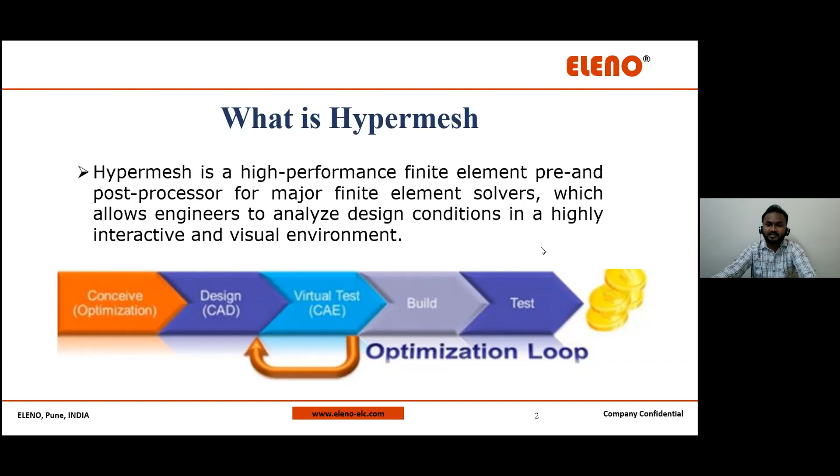Any engineering problem can be solved using three methods only: analytical method, numerical method, and experimental method. Do you know all these methods? Say yes in chat box if you know them. I think whoever has joined must know these things.

What is the analytical method? There are some formulas, and this is a 100% accurate method. If you are calculating stress for a cantilever beam, there is a formula, you directly put in the formula and get the answer. So the result is 100% accurate, and it's a closed form solution because we get the perfect solution.

But it's a classical method. So whatever basic applications or basic calculations are there, we can go with the analytical method, right?

Understood everybody? So next is the numerical method. What is numerical method? You learn this in 12th and first, second year of engineering - Runge-Kutta method, Taylor series, bisection method. These are all numerical methods. Integration by parts, matrix solving, these things are done by the software.

Which software? These softwares are the solvers, right? These are all called solvers. So what does a solver do? Solution of matrices is done by the solvers.

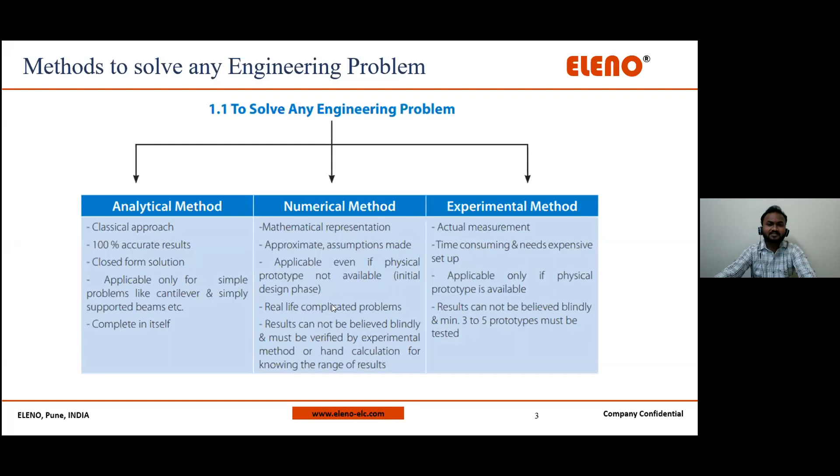Any engineering problem we are solving by using software goes through three processes. First is pre-processor, second is processor, meaning processing or solution, that is solver, and third is post-processing. Understood everybody? Preprocessor, processor, and post-processor. These are the 3 points we have to understand here.

So what pre-processing does, it consumes the most time out of the three. For meshing of plastic parts, 3D meshing, hexa meshing, most of the time-consuming part is the preprocessor. Agree with me? If you are using Hypermesh or any software like ANSA, preprocessor consumes a lot of time among the three.

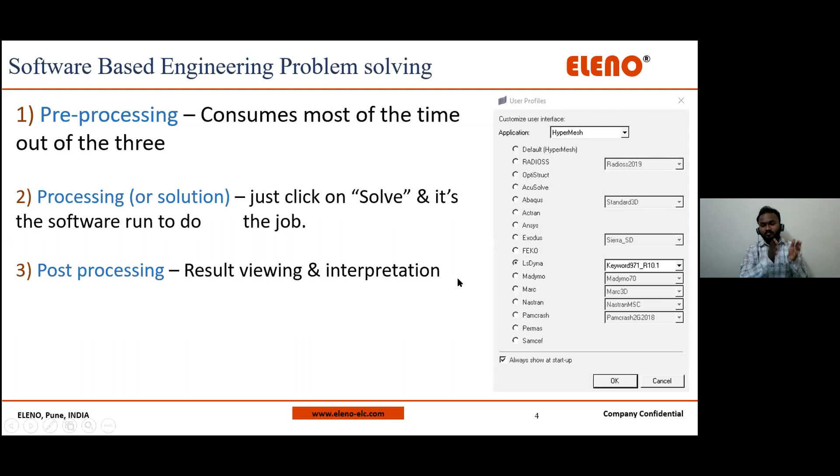See here, this is the user profile, okay. Whenever you open the hypermesh software, this user profile pops up. What is it for? So for which solver are we going to use hypermesh? Hypermesh gives support to Radioss, OptiStruct, Acusolve, Abaqus, ANSYS, LS-Dyna, Nastran, PamCrash, and likewise. So this is the most important thing, that the preprocessor supports these solvers, okay.

Got it? Yes, got it? Then please say yes. Understood? You can say yes.

Yes, Rajesh. Yes, thank you. Thanks for replying. Yes, Jishan.

So the next benefit is cost effectiveness. If you go for the pricing, hypermesh cost is much cheaper than others also. So pricing matters over here, because when we go to the customer, at the customer end we have to do quality work at minimum price. So cost effectiveness is the most important thing over here, right?

And solver specific user preferences. If I'm going for changing any solver interface, if I'm selecting, I will revise it once again in the next slide, okay. What is the solver specific user interface?

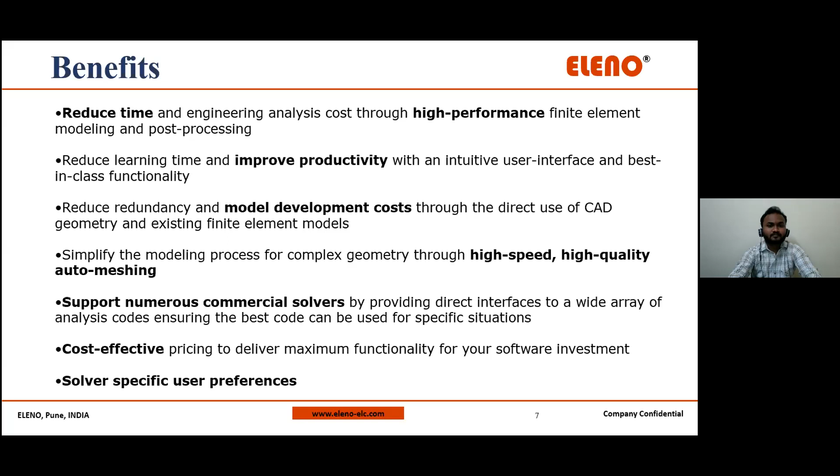Understood, right? So next, what is hypermesh and what we have to learn in hypermesh, okay. So what is hypermesh? It's a software we use for preprocessing, likewise. So what we are going to learn in this total session is introduction to hypermesh first, so we learn about that. Then creating geometric model, okay.

So hypermesh gives us a few geometric commands, right, so that we can create a simple model for any kind of analysis, right? So geometric cleanup processes we have to do, third step. Then next thing, 1D meshing, 2D meshing, 3D meshing, right?

So one dimensional meshing, then two dimensional meshing, three dimensional meshing. If there are certain parts, then we have to go for meshing according to the parts, right? So we will learn these things also.

Next to that, we will learn about maintaining quality criteria at each time of meshing, right? Quality criteria is the most important thing, because when we buy any product we check the quality. Likewise in CAE also there is mesh quality, right? So mesh quality, how to maintain it, how to clear all elements to okay quality, we will check in this panel, right? So creating FEA model.

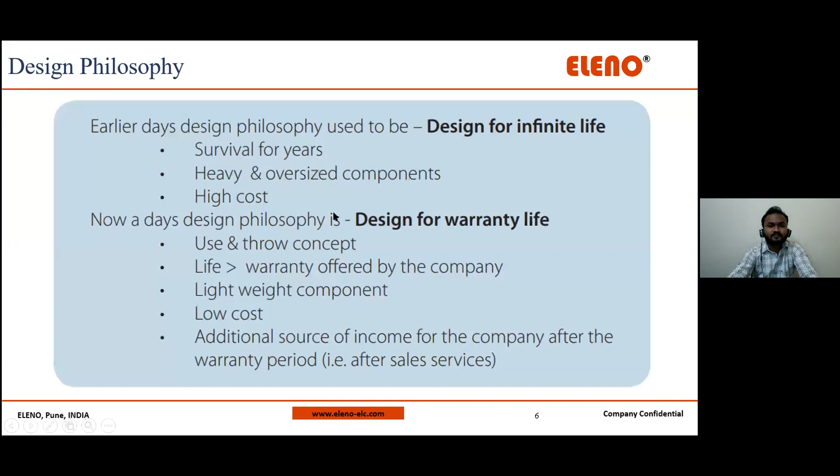So whatever model I have shown over here, see, likewise, okay. So likewise model for meshing we can do in this thickness assignment. There is a most important task: thickness assignment. There is variable thickness in plastics also, okay. So we have to go with thickness assignment according to the variable thickness, right?

So we learn plastic meshing, because plastic parts have some different kind of features, ribs over there for strengthening the parts. So we learn plastic meshing over here. Then fast meshing techniques, because fast meshing technique is much more important for interview purposes. If you are going to crack the interview, you have to focus on the part within 1 hour. Within 1 hour you have to finish maximum amount of part with quality, right? And feature capturing also.

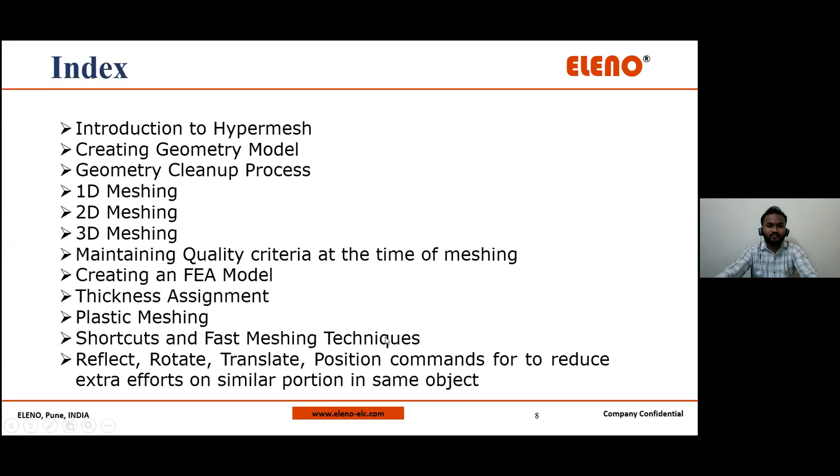Then some reflect, rotate commands also there, right? So see, now today we will learn about the hypermesh window, okay. So how does the hypermesh window look like? Okay, yes please, is it visible to all of you? And whatever we learn, is it understandable? Okay, yes please answer from your side, use the chat box.

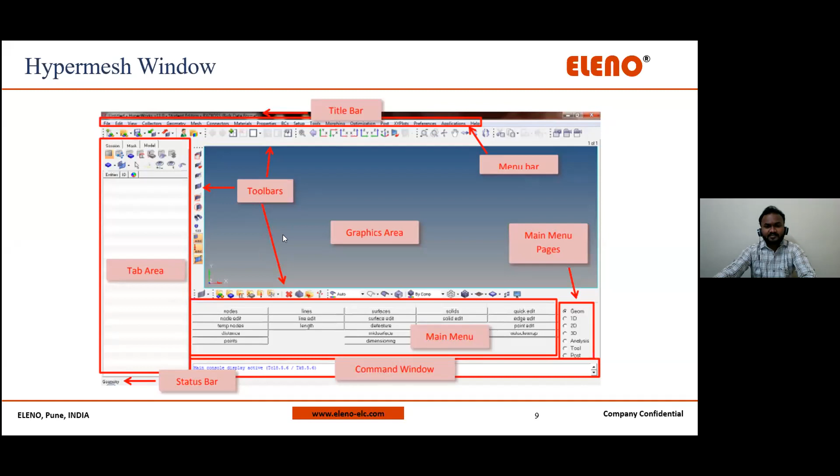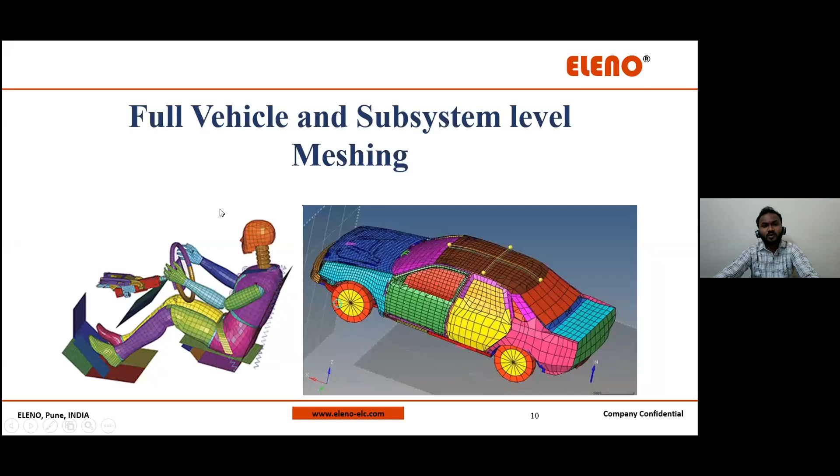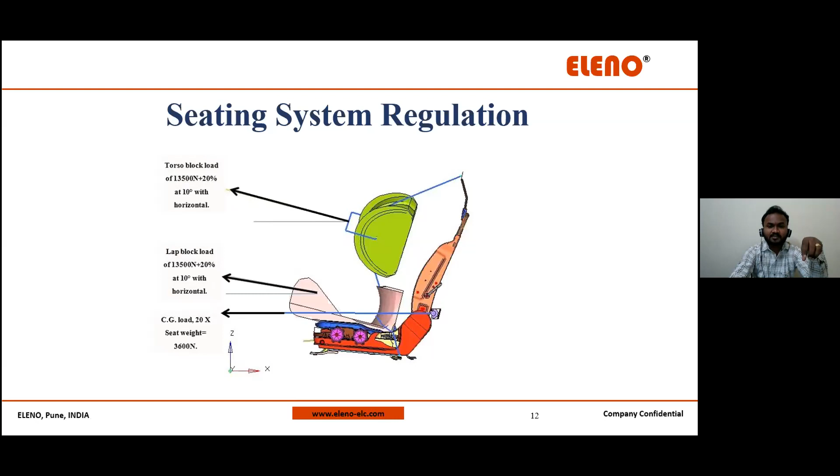We can model subsystem level up to the full vehicle level. In hypermesh modeling, in a basic way, we can go from subsystem level to full vehicle level meshing and modeling. Then next, simple analysis from ball impact up to seating system or subsystem level regulations, to the full vehicle frontal crash, or full vehicle analysis. So all these models we can prepare inside hypermesh.

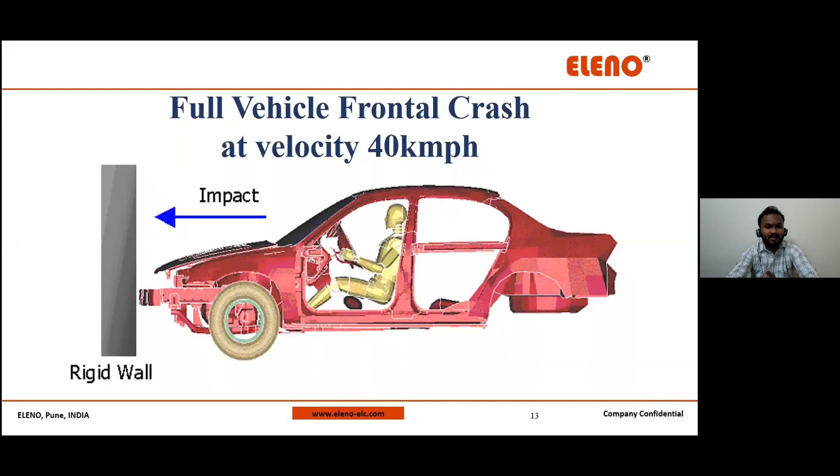Understood? So, ball impact on a 2 mm thick plate, up to the full vehicle crash - up to full vehicle crash we can prepare the model and meshing in hypermesh itself. So this is the basic preparation for a CAE interview.

Why do we go for this meshing and all these tasks? So, any interview questions regarding CAE, do you know? Every time meshing comes up as one question, right? Yes, anybody?

So what is the CAE interview technique? Is it right or wrong - short written test, meshing or analysis test, and then interview. Is it okay? Say okay. Is it okay to all of you? Yes, Reddy says okay, Rajesh okay.

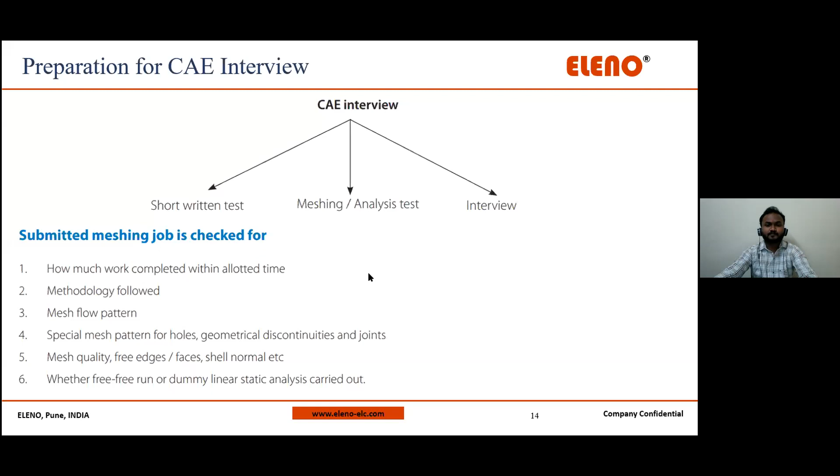Yeah, okay next. Now today we will learn a few things in HyperMesh. We'll start the first class of HyperMesh, because by now we've taken a lot of time over what HyperMesh is, how to use it in industry, and where we can go for job interviews and all these things, right? So now we will prepare such models, geometrical models, right? Understood up to this?

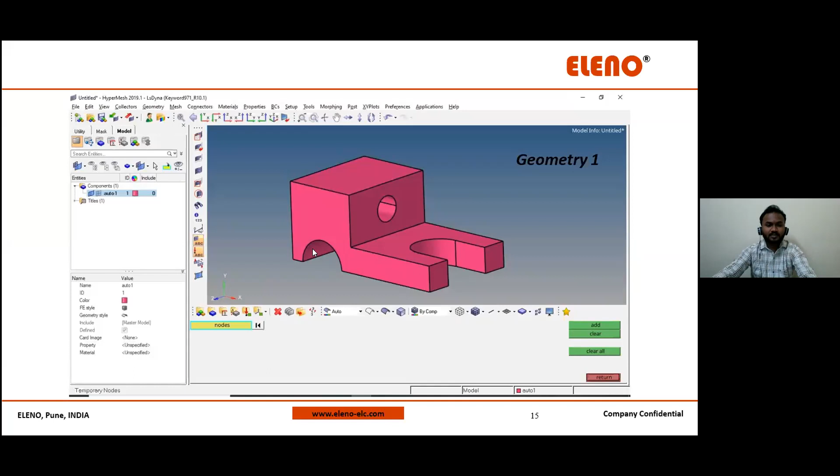See here, this is my HyperMesh window, right? Is it visible to all of you? Yes, okay, thank you. So whatever we learned before, we will learn once again over here, right?

This is the title bar. It says untitled, HyperMesh 2016.1, and we are using LS Dyna as the solver. This is the drop down menu bar. Then next is the toolbar, this is also toolbar, and this is also toolbar. Then graphics area, upper tab area, lower tab area, main menu pages, main menus, right?

So simple flow for HyperMesh. For a newcomer, just keep this in mind: if you are going for any geometric task, if you want to create a surface, a solid, or a line, it's a geometrical part, so go to geometry. That's it.

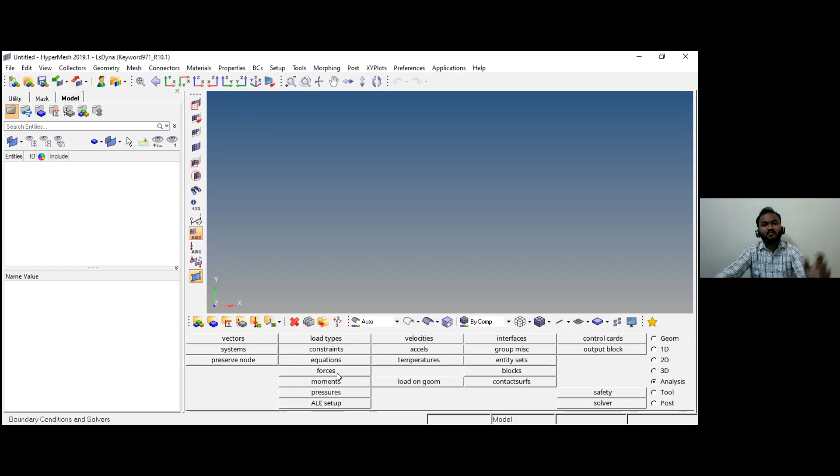If you are going for 1D meshing, go for 1D. For 2D meshing, sheet metal meshing, go for 2D. If you are going for volumetric parts, go for 3D meshing. Then analysis: if you are going for any type of load application, constraint, force, or moment application, then go for the analysis. Understood, everybody?

Then tools. What is tools? Whatever meshing we have done, if there are similar parts, we use translate, rotate, reflect - these are commands we have to learn under tools. What will it do? It will reduce your effort, minimize your effort on the same part. You can translate, reflect, rotate, project. And post is for post processing.

So today we will learn about the first chapter, which is geometry. Got it? Yes, thank you so much. It means whatever I'm teaching to you is understandable, right?

Let's see the quick commands for geometry. Can you import one geometry to explain? I don't have any IGS file right now on this PC, but I'll show how to import the geometry. Here is the import command, or file import.

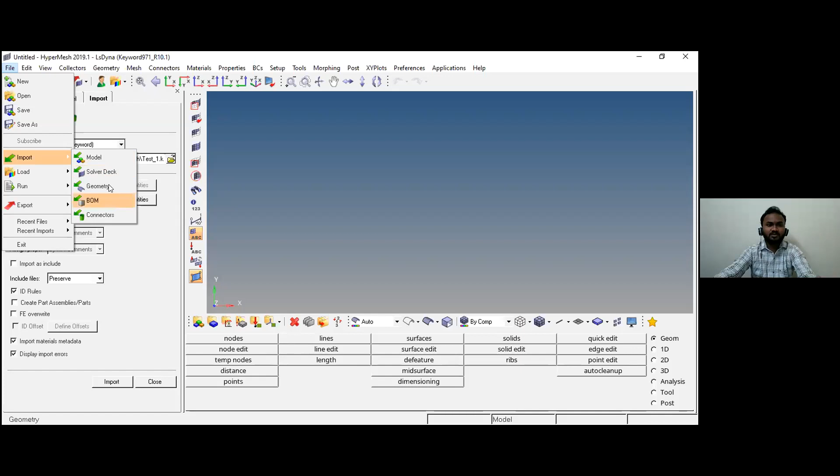If you are going for any geometry import, use this geometry option. If you are going for model import, whatever HM model you have, use import model. If you are going for mesh import only, go for solver deck import. So for geometry import, you can choose the IGS file and open it here. I don't have any CAD file right now, so we'll proceed likewise. Today we will learn how to draw anything, a geometry.

So geometry - how to create a node. From node we will learn up to solid. How to create a node: there are multiple options to create a node over here. By using the coordinate system you can create a node, and if you go on surface, you can also create a node on surface.

On the lines you can create nodes, and if two nodes are there, in between these two nodes we can create multiple nodes. What is a node first of all? If I am going to create by XYZ coordinate system, create, and press F, fit to screen. Otherwise there is another option in toolbar. See here what it is - it's fit model, right?

This is a node. If I'm going to draw a cube over here, what do I have to do? Something 50, create, fit to screen, right? Understood?

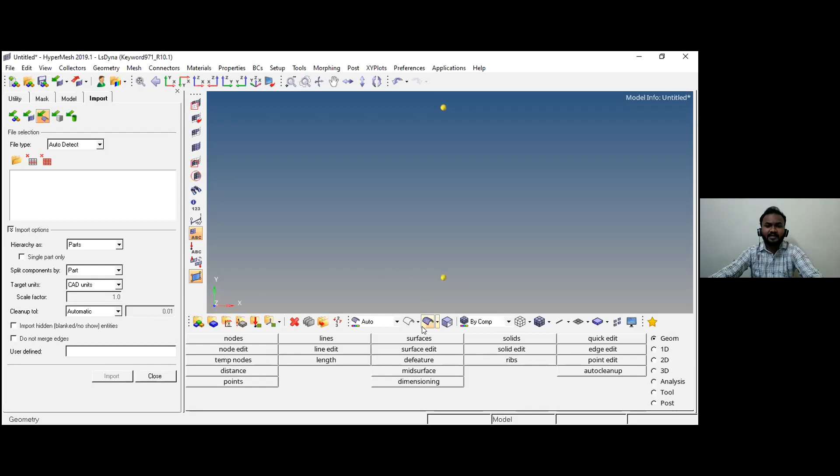Now geometry lines. I am going with the geometry panel. I want to create a geometry of a cube, suppose. So I go to the geometry panel, and I'm going to prepare the first node. From node I'm going to prepare a line. From line I'm going to prepare the surface, and then solid, right? This is the path for creation of any geometry. There are some shortcuts, but this is the classical path.

You can create a cube directly here, but these are the primitive shapes we can create. If you want to go with other shapes, you have to go with nodes, then prepare line, then prepare surface, then go to the solids. Understood, everybody? Yes Rajesh says yes, Jishan yes, Tejas yes.

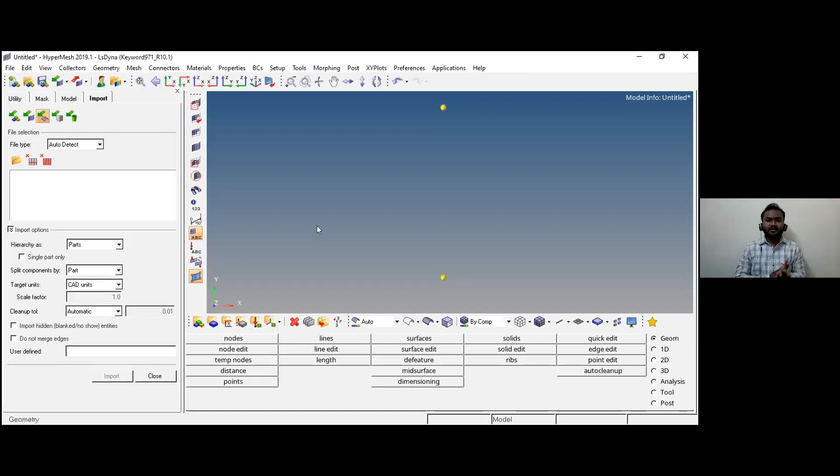So anybody can answer me why we are going for preparing geometry over here? Is it necessary to prepare geometry or learn geometry in HyperMesh? Say yes if necessary, say no if not necessary.

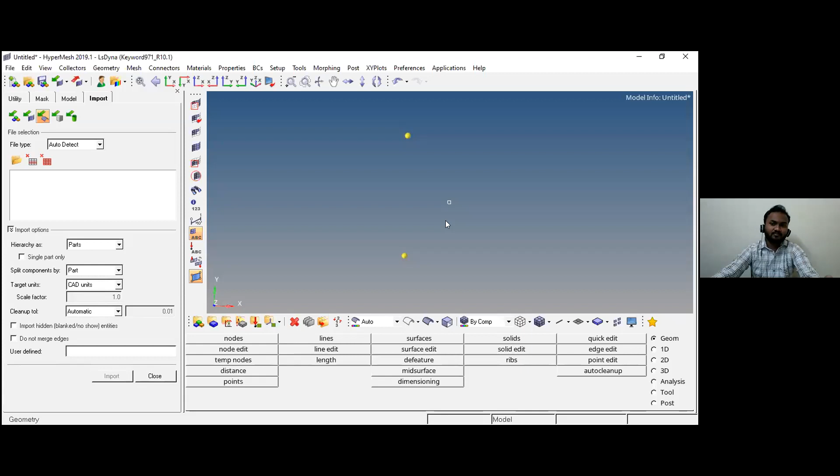Rahul says for simple models. Rajesh says to perform meshing - so for performing meshing, we have to go with the meshing tools. Sachin says necessary. Prashant Jagtap says for simple model design modifications it will be useful. So any design modification, if you want to consider, then you are not going each time to a CAD engineer to do necessary changes. You can go with your HyperMesh geometry section and create or reconstruct the model wherever required. If a CAD model is there, then it's not required - perfect answer. Then, maybe if needed during geometry cleaning. Rahul says yeah, thank you. These all answers are correct.

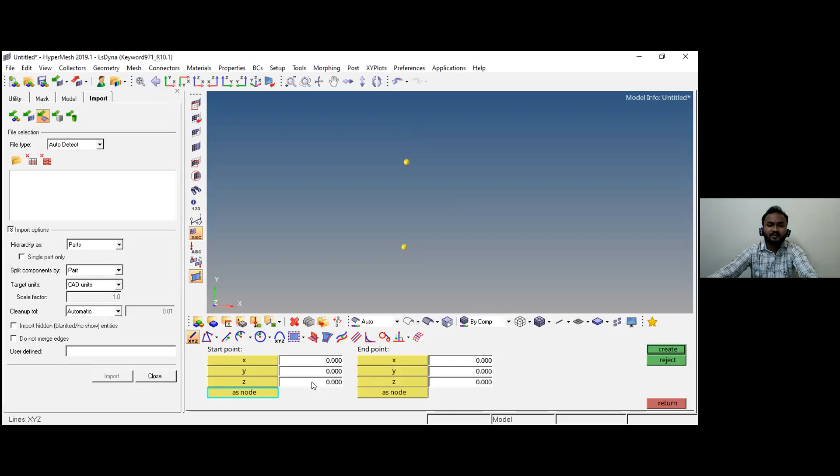So next thing, geometry lines - go with this also. You can select as node this node. Whenever I am selecting this node, see here the coordinate system gets changed as node this node. Got it? So create.

If I'm creating a line over here, what will happen? If I'm going to this model here, component will get created. Got it? Before that, reject - if I'm rejecting the part in upper tab area, nothing will be there. If I'm going to create line, component gets created auto one, right? So what is the purpose of this component? It contains meshing as well as geometry. Line is a geometrical part. Now on the screen, there is no mesh.

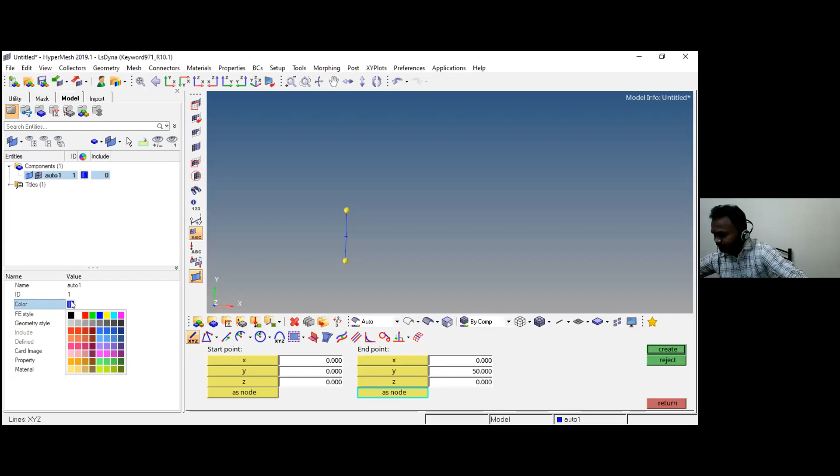Understood, everybody? So next, if I want to change this color because it's not visible to me also... Yeah, so this is a line.

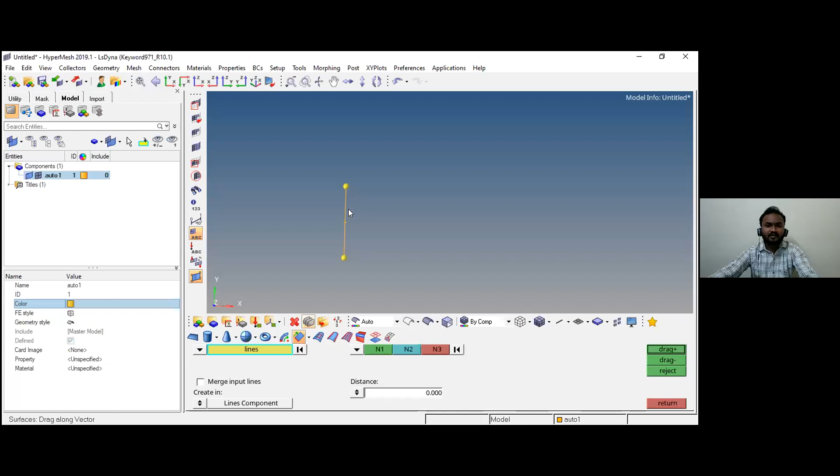So I want to create a cube - then what to do? See here, geometry, I go directly to the surface. There are a few commands over here, I'll go one by one. This is drag along vector. If you are going for any CAD software, there is an extrude command - so likewise here, drag along vector. Click on this line, and in which direction you want to drag - if I want to drag in x-axis direction, this will be your x-axis, and distance 50 mm drag. Got it? Understood? See here, this is a surface.

If I want to create a solid from this surface, I can go to the solid command. There's also an option here - what is it? It's a drag along vector. Same thing here, I'm clicking on this. So select on surface, select on surface.

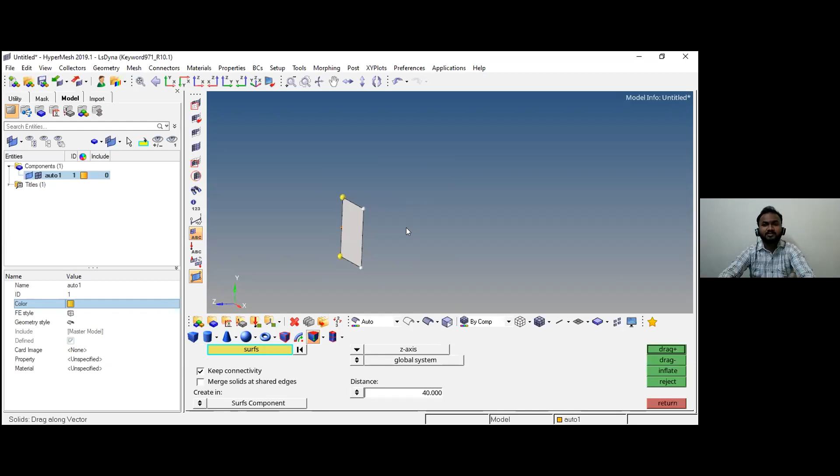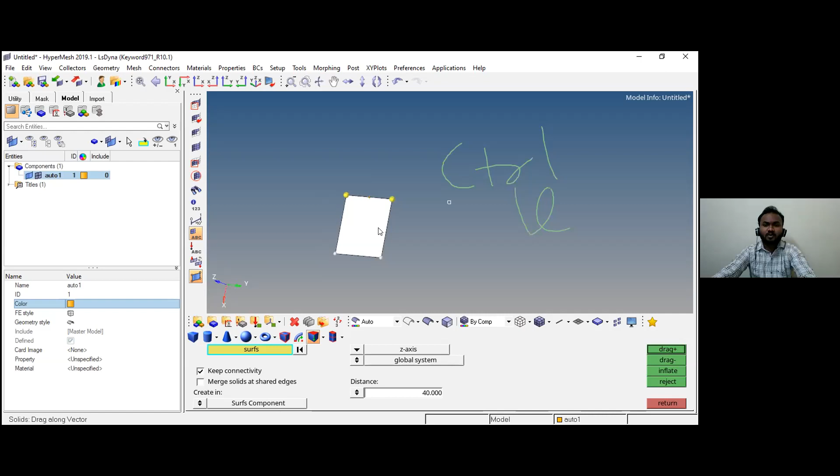Now, for newcomers, one thing I forgot - how I'm using this mouse control. If you are pressing control, then only your mouse will work, otherwise it will not work. If you are pressing control, then left click - control plus left click - it will rotate.

If you are not using that, there is a command here also, see, rotate. You can rotate from here also, but in which direction you are rotating, you have to rotate with the axis only.

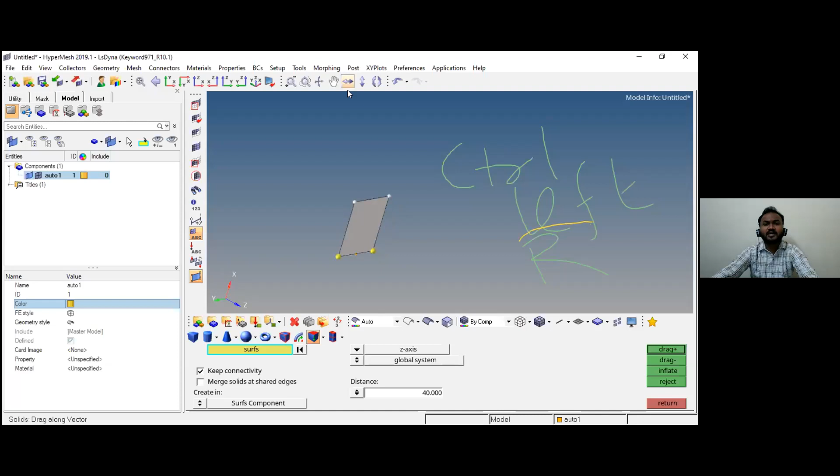Next thing, control right click - it's a pan. Control right click, it's a pan. Control plus scroll, zoom in, zoom out.

What happens if I am rotating such a part and I want to go back to where I started - I forgot where I started, which axis I have used. For that purpose there are axis notifications here: XY axis, XY axis in opposite direction, then XZ axis, XZ axis, YZ axis. I will go with the XY axis - see, okay, so you will get this.

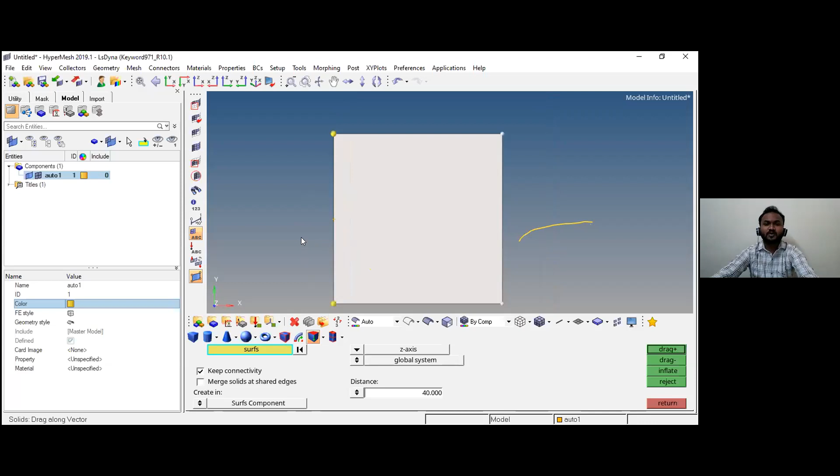Understood, everybody? Say understood in the chat box. Yes please. Have you understood? Yes, thanks, thanks a lot.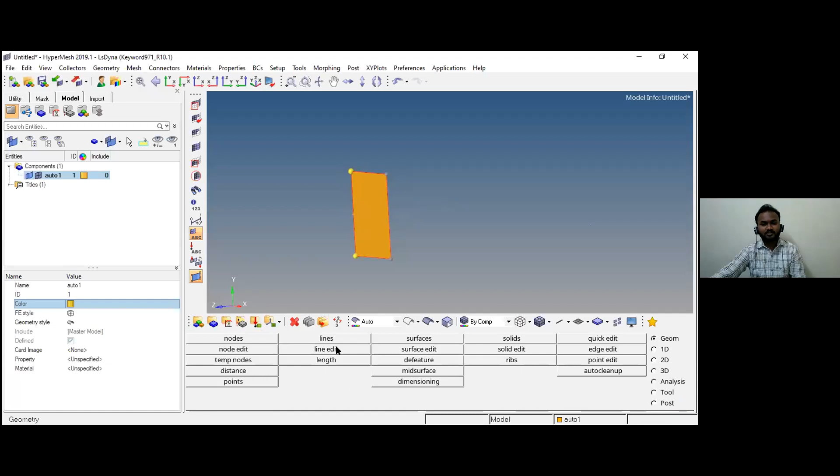So next thing, I want to create a solid - how to create a solid? Same thing - if I am dragging something, it will convert into the further thing. What I'm saying is geometry: if I'm going to drag a node, sorry, line - if I am going to drag a node, from node it will create a line.

If I'm going to drag a surface, see here - if I'm going to drag a line, then it will create the surface. Same thing in solids also - if I'm going to drag along the vector surface, it will create a solid.

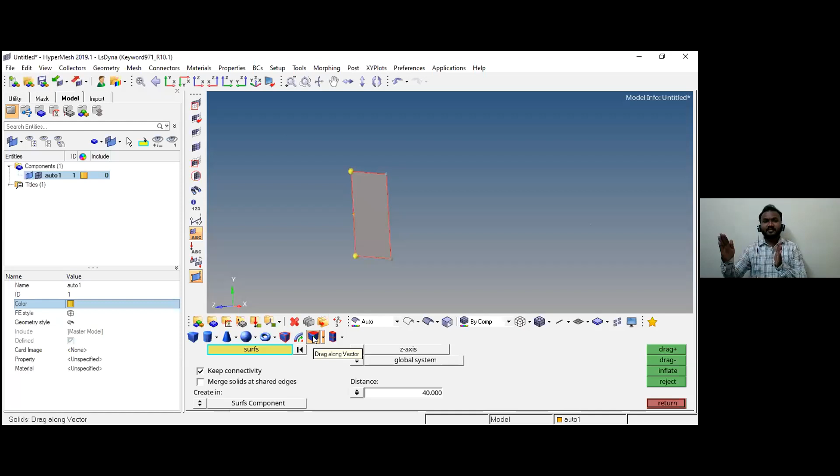So click over here, solids, right? In which direction? You have to select the direction perpendicular to this plane. Why? Because if you want to create a solid, then you have to select this Z direction. See, this is the axis notification: X, Y, Z. So Z direction in positive or negative direction, whatever it may be - I'm creating this here, 60 mm. Okay, this is a global axis.

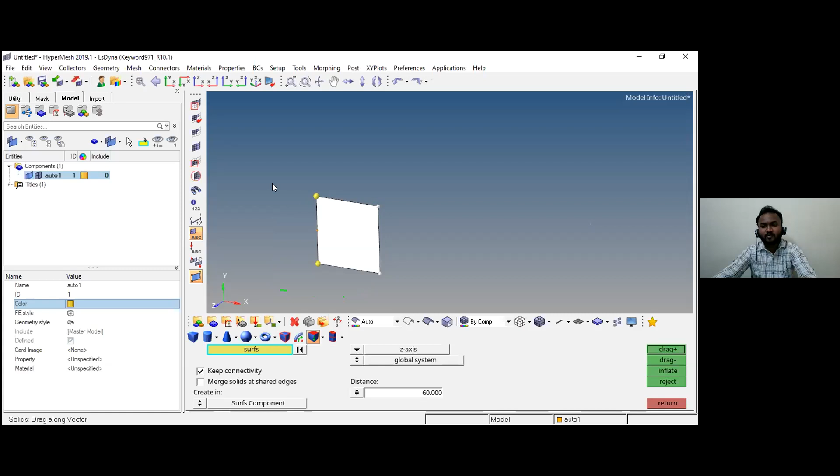See here, normal to screen you can drag, normal parallel to screen you can drag, right? See what happened - if I'm going for reject and drag minus, it will go in reverse direction. Understood everybody? Yes, please say yes.

Yes. So what happened, each time we have a solid section, right? But if you want to put a hole over there, same thing, geometry nodes. If I want to create a hole over here - Nivas asks, what happens to that surface? So the surface gets converted into the solid, right?

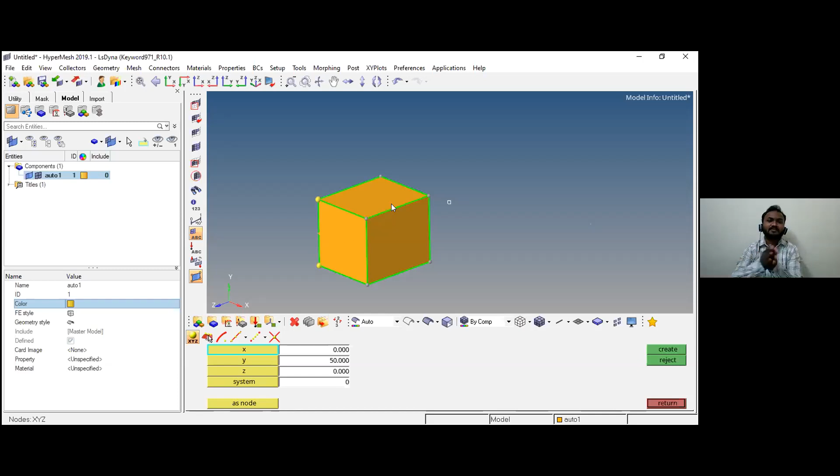Rajesh says, how can we drag in a parallel direction? We cannot drag in parallel direction. If I am dragging this in parallel, what will happen? Is it converted into solid? No. We have to drag perpendicular to this plane, only then will it convert into the solid.

Right? So next, I want to create a hole over here. So here's one option - what is this option? Arc center. Click over here: 1, 2, 3, 4 - if I'm selecting these 4 lines, these are closed lines, and create. What will happen? It creates a node centrally - center node will happen over here. It will create a center node.

The next thing, same algorithm we always use: first we have to create a node, then line, then surface, then solid. Understood? This is the perfect rule for any kind of geometry - line. I want a hole over here, so I am taking this circle with a radius of 5 mm or 10 mm - 10 mm radius is fine.

And create - if I'm saying create, it wants the plane. In this plane I want to create a circle, right? In this, which plane is this? XZ plane, right? So I'm selecting the y-axis here. If I'm clicking on the y-axis, then it will select the XZ plane, right? So create - see here.

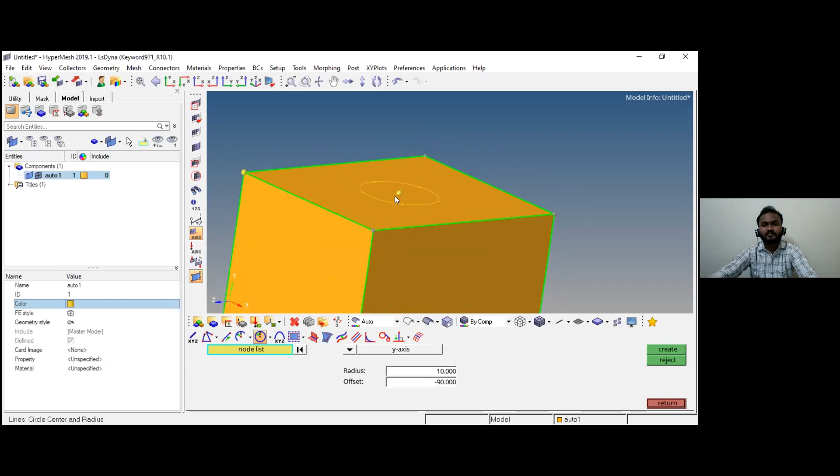Understood, everybody? Now 15 minutes to go. Okay, so see here.

Geometry, surfaces. Now this is the surface, this is a line. I want to convert it into a surface. These are the options. So here's another option - wherever closed lines are there, you can select and convert it into a surface. This option is a filler or spline, right?

Click on this, it wants a line. So I am selecting this line over here. Selected, and create. Got it? Is it understood, everybody? Please say understood in the chat box.

Yeah, now we will repeat the same thing once again. Okay, geometry, solids, surface getting selected.

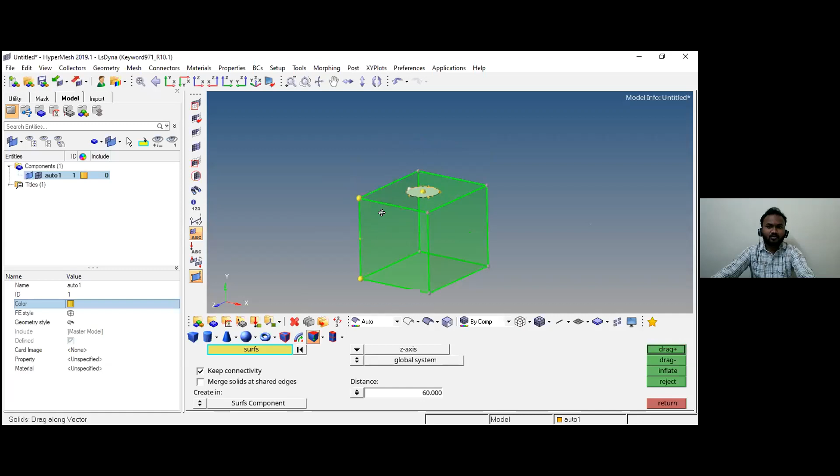I want to drag this in here, in the y-axis. Okay, got it?

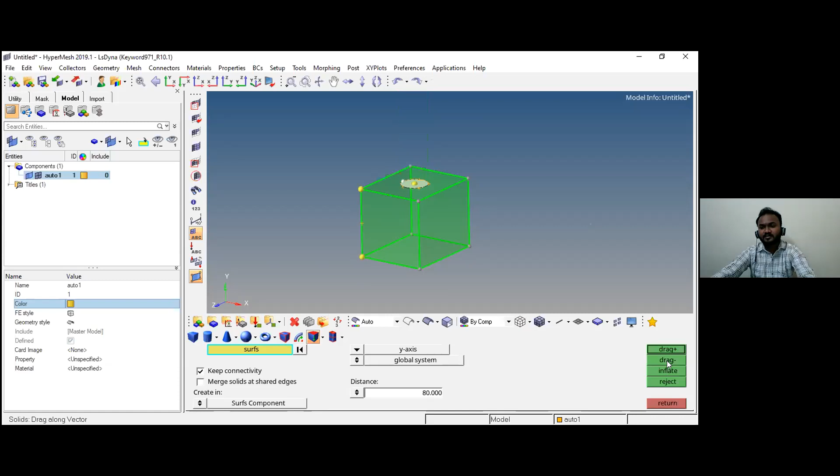Something 80 I'm taking and drag. See, reject, drag. I want to delete this geometry - solid edit, Boolean operation. A, I'm taking this as B, and A minus B - remove B from A, calculate. See, got it?

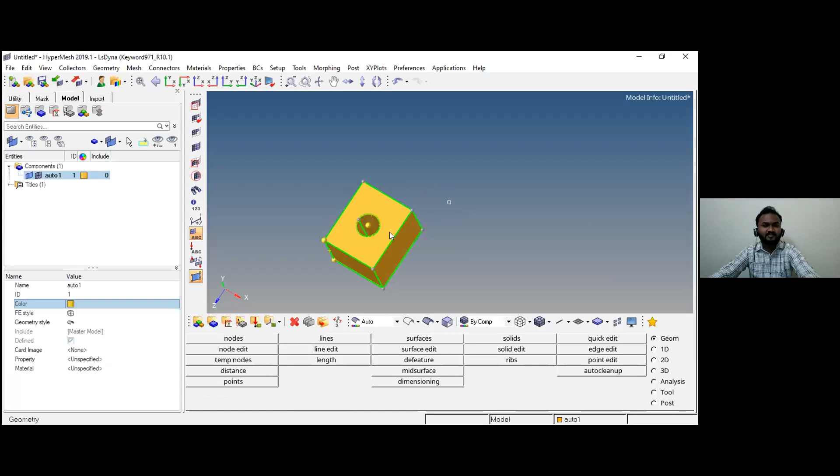Yes, see, yes. So next to that, we have created this solid. So this is how we can go for any kind of meshing also, right?

So for 2D meshing, if you want to go with 2D meshing, you can come up with this manual meshing command and automation command, right? So here we will stop for geometry.

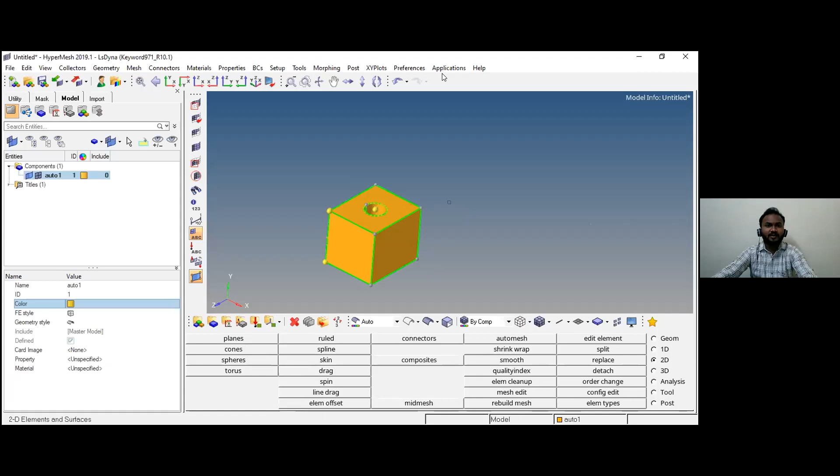Now I will share this PPT over here. So this kind of solids we can generate. See, is it visible? PPT visible to all of you? Yes please. PPT visible? Yes please, okay thank you.

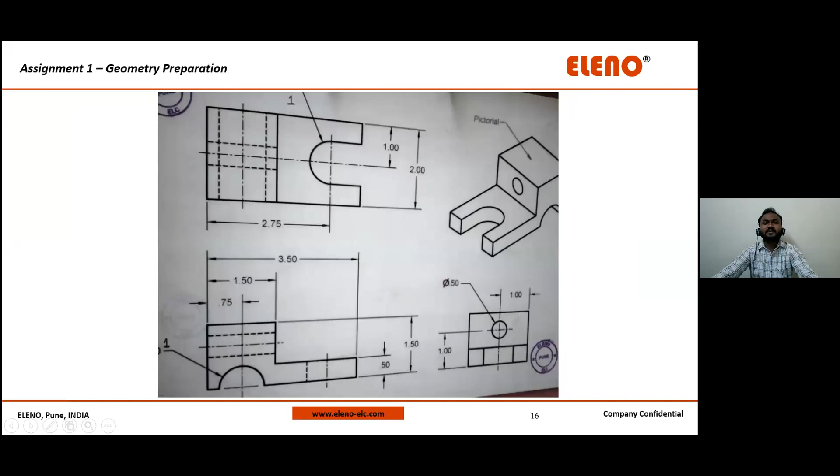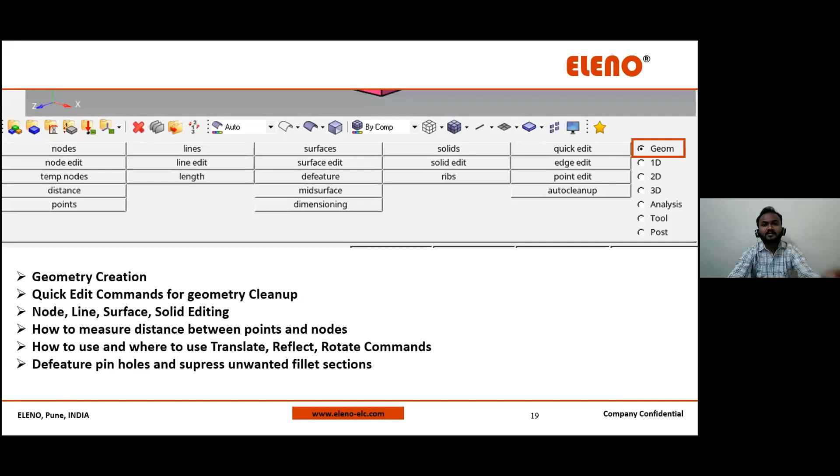So likewise, we can create some geometries. See here, these are the geometries we can create by using Hypermesh. Okay got it? So after that, we can learn in the next session how to set the quality criteria.

Then next, parameter files - how to set it, how to put a washer, what are the fast meshing commands. Then the basics of quality criteria - what is sizes, and we will learn about the definitions. Warpage - what is warpage, what is Jacobian - these are all definitions we have to learn.

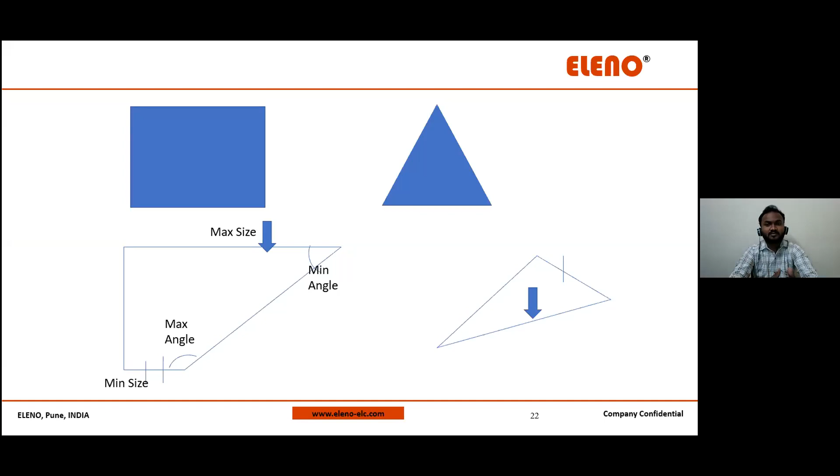Why we are going to mesh on mid-surface - these are all questions frequently asked in interviews, we will learn over here. Then, how not to mesh, how to mesh - these things we are learning in the next session. Okay, so have you understood this session?

Yes, got it? So how many of you here are graduation, post-graduation, and working? Yes, can you please put it in the chat box so I get an idea of the crowd joining.

Yes, Rajesh is joining, thank you. Yeah, working - yes Reddy, yeah working. Thank you, yes working. Yeah MTech working, yes Tejas. Yes Tanmay, thank you. So all are working, and sometimes it takes difficulty. Okay yes Sheikh, yes graduation, Jisan.

So for all of you, there is an opportunity in the CAE field, basically, and we are here.

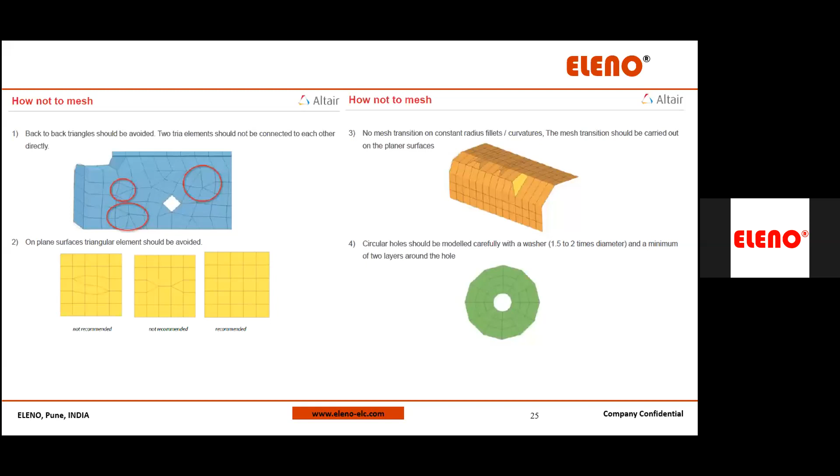Yes, thank you so much. Thank you all of you. You are most welcome. See you, thanks guys. Thanks sir, thanks, yeah.